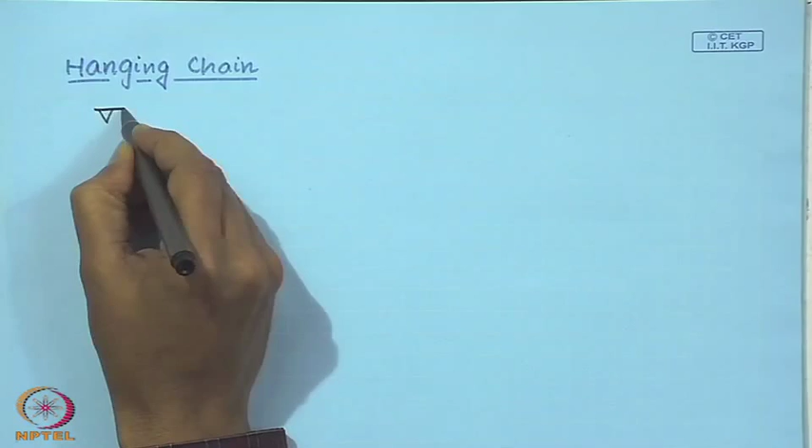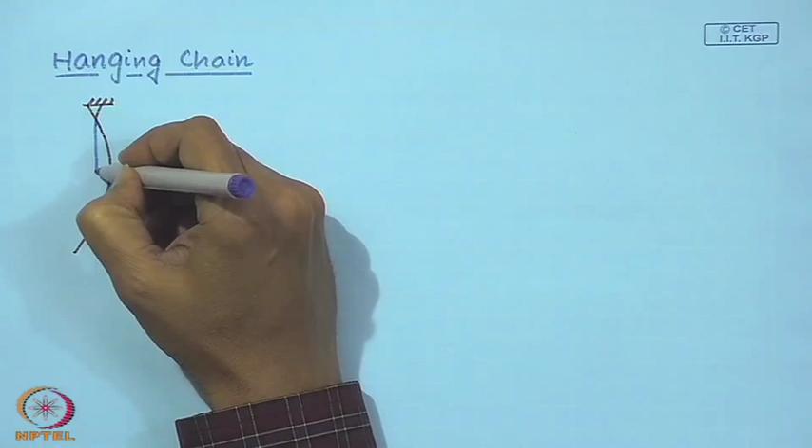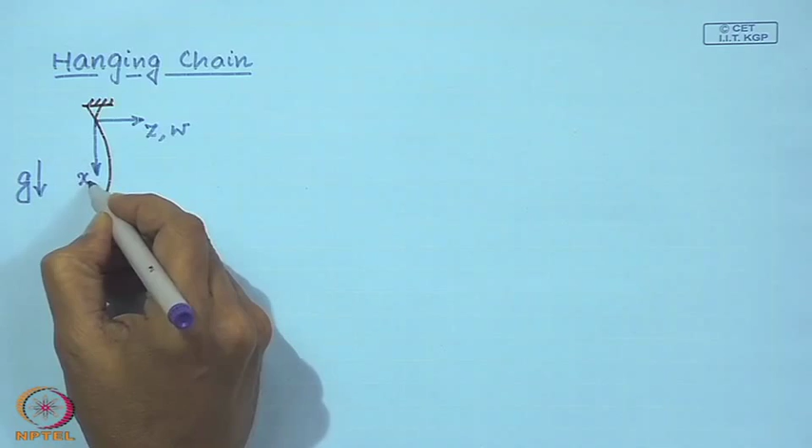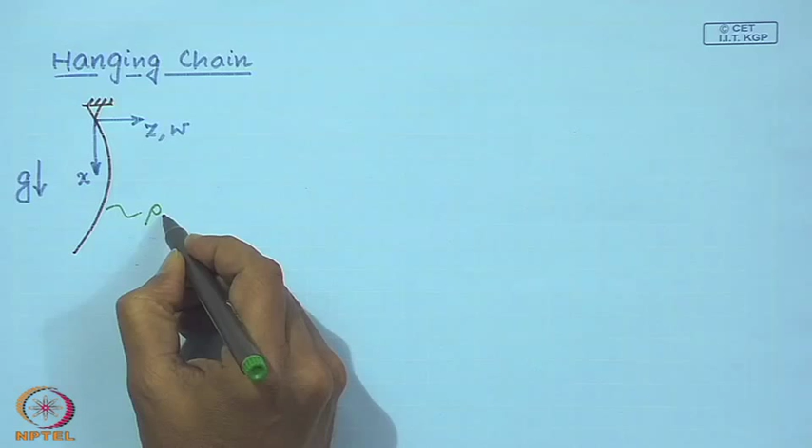Let us consider this chain hanging in a uniform gravitational field. We assume that this chain is made of a material of density rho, has a constant area of cross section A,

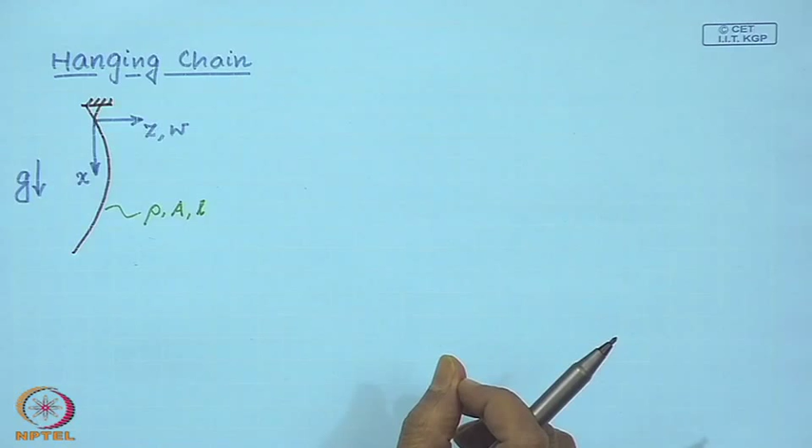and has a length L. Now, this is an inextensible chain. Though it does not resemble a string in that sense, which is a one dimensional elastic continuum, this is inextensible. Yet, as we will see very soon, the equation of motion, at least up to the linear order,

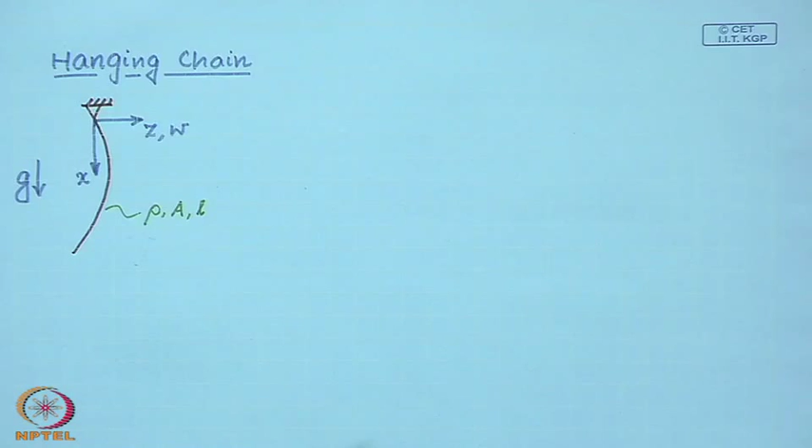is similar to that of a string. So we are going to write down the energy expressions, starting with the kinetic energy. At any location x, our field variable is w(x,t).

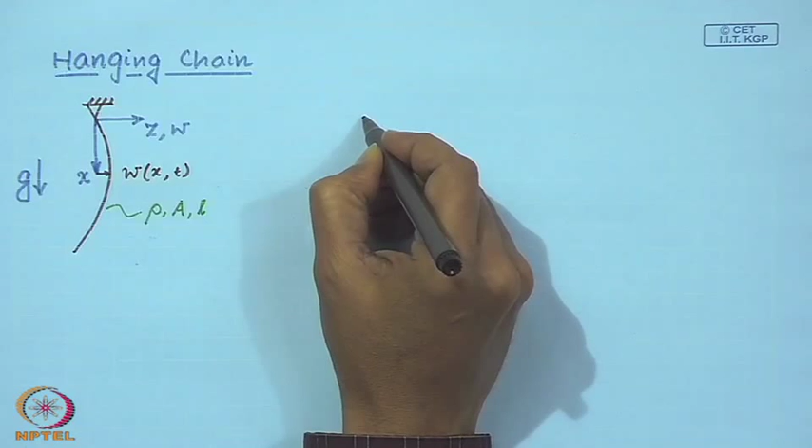So the kinetic energy of an infinitesimal element can be written as half rho A dx, which is the mass of the infinitesimal element, times velocity squared. If I integrate this over the length of the string, then what I have is the kinetic energy.

Now the potential energy of this chain. Why does this chain restore back to its vertical position? It is because as it deflects or is disturbed, the potential energy of the chain changes - it increases. To calculate that, let us look at a small element of this chain.

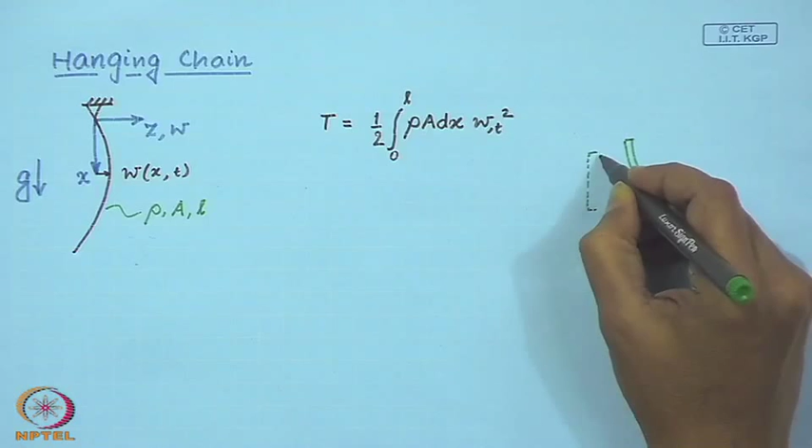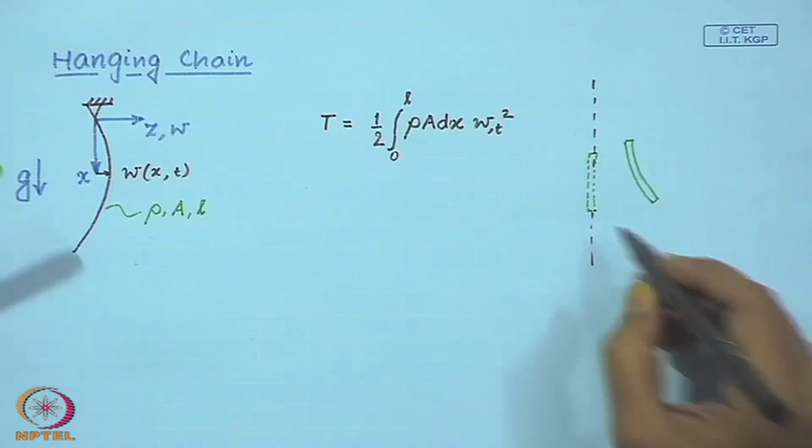This is the undeformed configuration of the chain, and this is the deflected configuration. This infinitesimal element had a length dx.

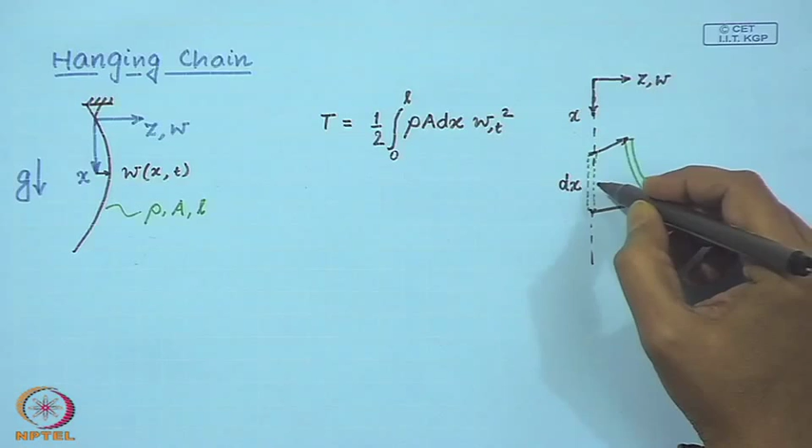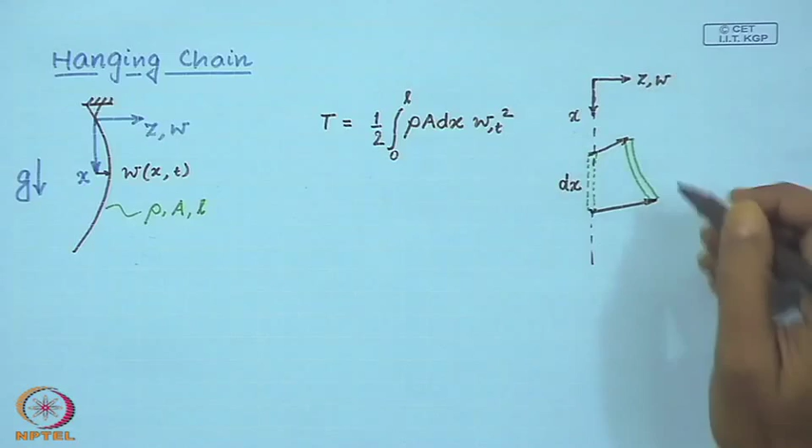Since this chain is inextensible as we have assumed, the length of this infinitesimal element in the undeflected or equilibrium configuration is the same as in the deflected configuration. So this is also dx, but now this is deflected.

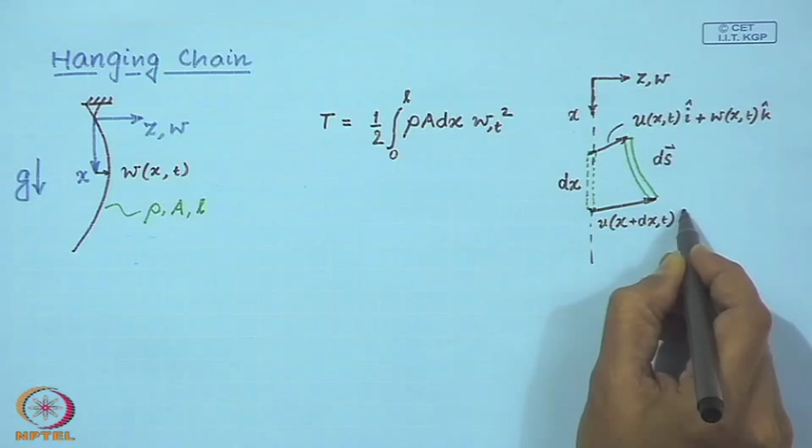So I will represent it as a vector whose magnitude is dx, and I will represent these vectors this way, and this vector at x plus dx is given by this vector.

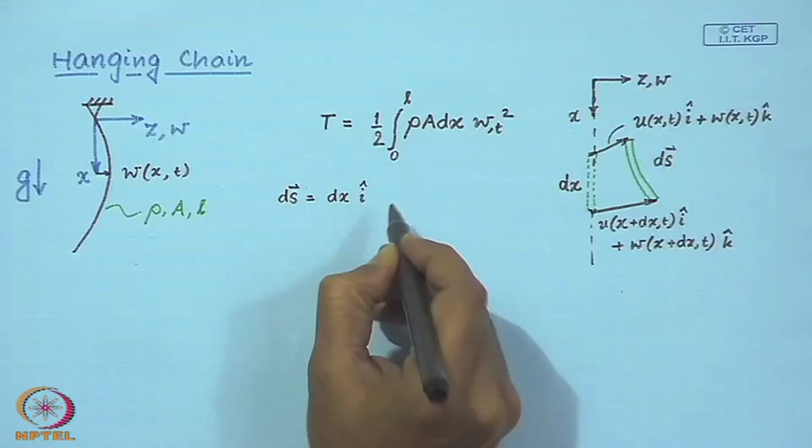So if you write out this vector equation, we can represent this ds vector in terms of the deflection of the chain.

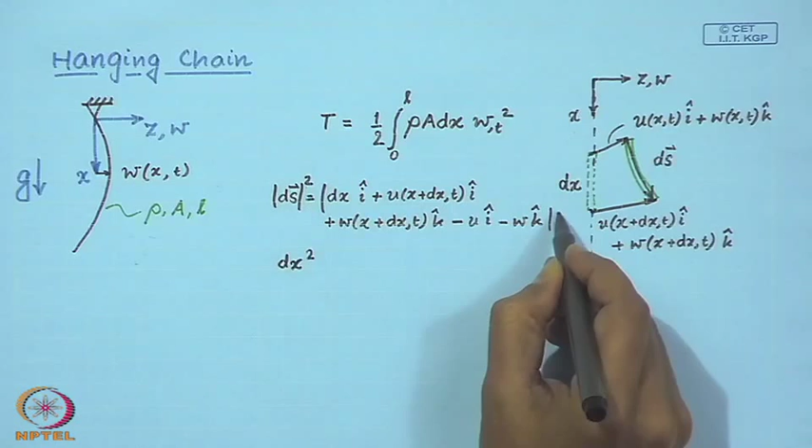Now if you take the magnitude of the vectors on both sides, then as I mentioned, the magnitude of this is still dx because the chain is inextensible. So what I will do is take the magnitude squared, let us say, and if you simplify the right hand side,

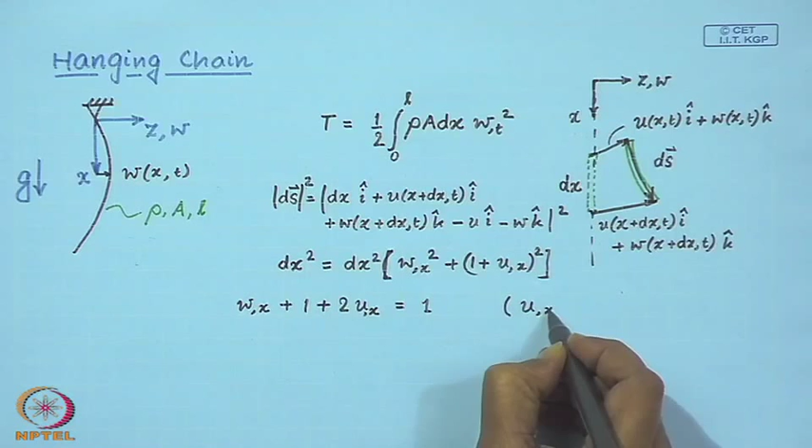we have this expression from which we can write... now here I have made this approximation. In this step, while coming from this step to this step, I have assumed that del u / del x is much smaller than 1, so in this expansion I have dropped the term (del u / del x) squared.

This implies... so I have represented the axial deflection or axial motion of the chain. Now this is very different from that in strings - in strings we had neglected the axial motion, but in a hanging chain we must consider this axial motion, because that is the reason why the potential energy of the chain changes as the chain deflects from its equilibrium position.

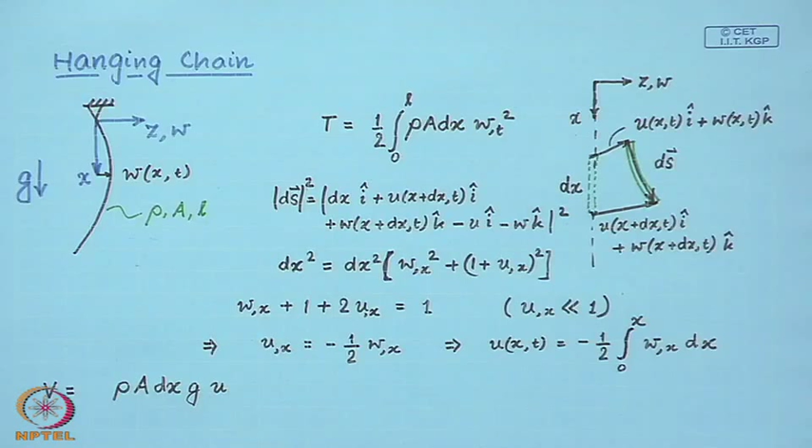So that would be the potential energy, and if you integrate over the length of the chain, that gives the net potential energy, assuming that the potential energy is zero in its equilibrium configuration.

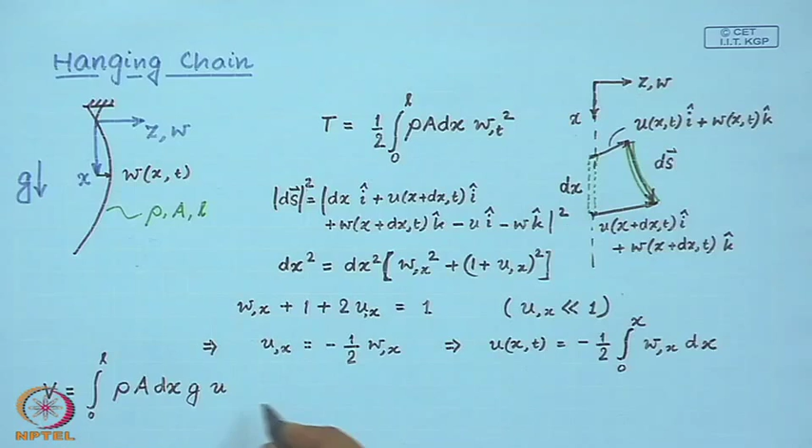Now what I can do is integrate this expression by parts. I can write this taking u as the first function and rho A g as the second function,

so the first function times the integral of the second function, minus the integral of the derivative of the first function times the integral of the second function.

Now this simplifies - this boundary term can be written as u evaluated at L, so that would mean this integral with x replaced by L.

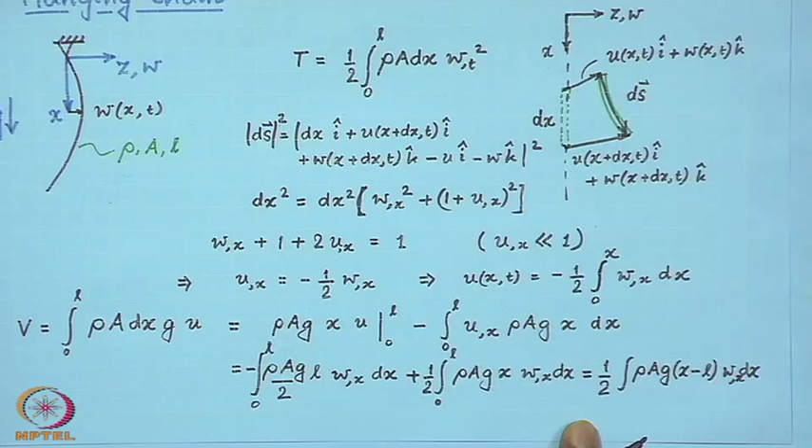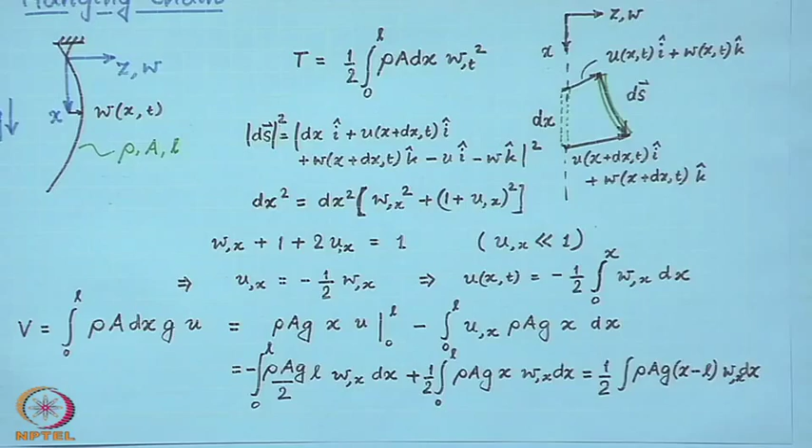So we have the kinetic and the potential energy expressions of the chain. Let me write them again.

So if you look at these expressions, this kinetic energy expression resembles the kinetic energy of a normal elastic string, and this potential energy expression also resembles that of a string, except for this term.

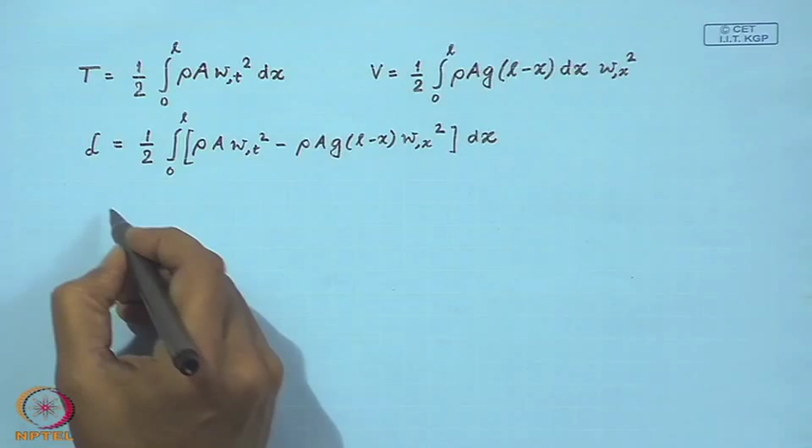may be expressed like this, and from Hamilton's principle, which says the variation of the action is 0, we can write...

Now here, once again, as we had done before, we will integrate by parts this term with respect to time and this term with respect to space, to obtain...

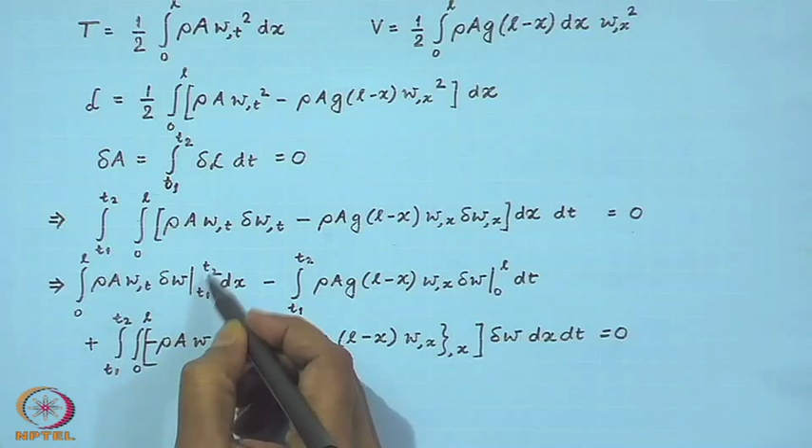So this is what we obtained finally. Now, as we had stated before, since we know the configuration of the chain at the time instants t1 and t2, there cannot be any variation of the configuration.

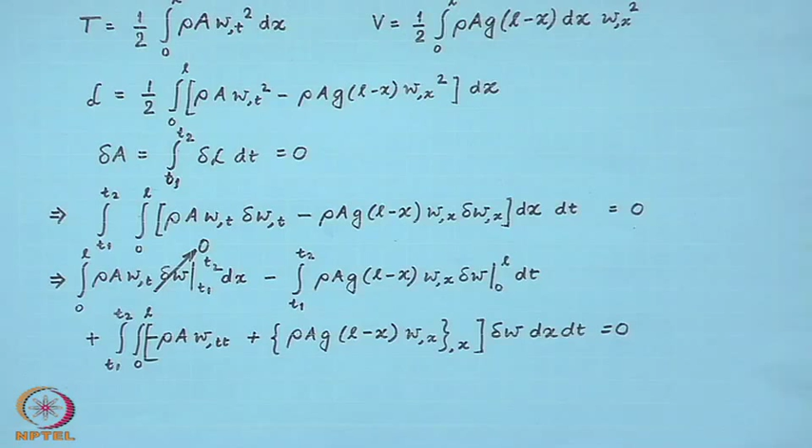So at both times t1 and t2, this variation must vanish. Now here is a term which is evaluated only at the boundaries, and here it is evaluated over the full domain, integrated from 0 to L. Now, I can always hold the boundary variation fixed and change the inner portion arbitrarily, so therefore, if this sum has to vanish, they must vanish separately.

So for arbitrary variation, if this integral has to vanish, then we can write this must be 0, which is our equation of motion of the hanging chain.

Now, these boundary terms must also vanish, so this will give us the boundary conditions. So let us have a look at the boundary conditions.

Now, at x equal to 0, at this boundary, either this must be equal to 0, or, now in our case, if you consider that the chain is fixed at the top end, then this is the boundary condition.

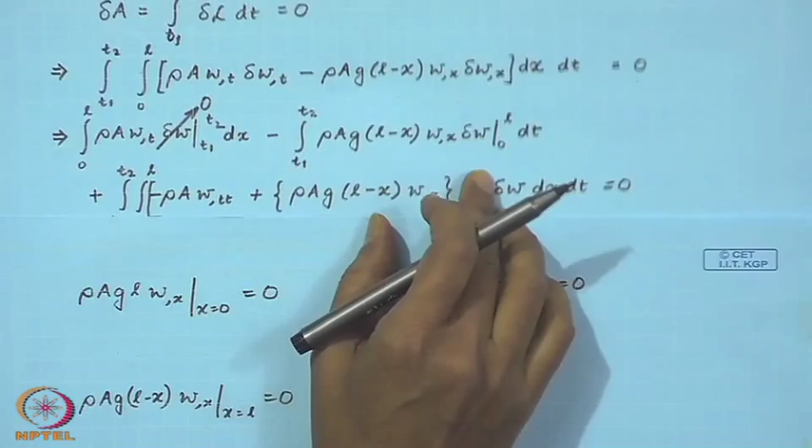So here, as you can see, at x equal to L, this term vanishes. Now, this, remember, was the tension in the string, and tension at the free end of a hanging chain is definitely 0.

So if you consider this, there is a product. Here, in this case of a chain with a free end, this vanishes.

Now, in order to have 0 contribution from the boundary at x equal to L, you must have this variation to be finite, because this part of the boundary term is 0 at x equal to L.

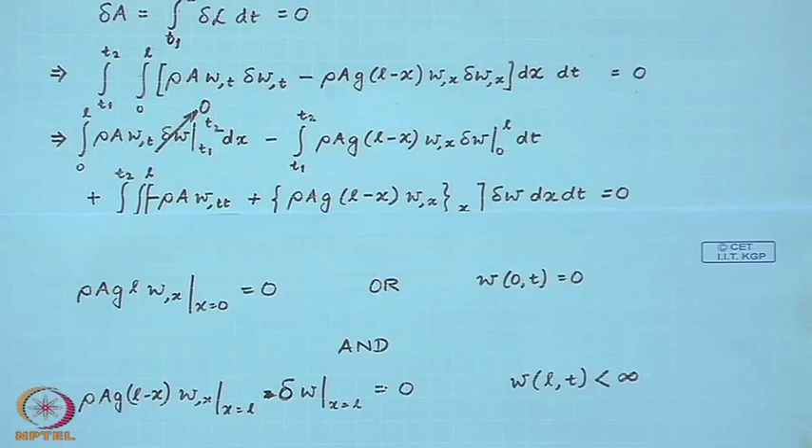So therefore we usually say that the deflection of the string, of the chain, at the free end must be finite, and the implications of this boundary condition will be seen when we discuss the solution procedure for the string, the hanging chain.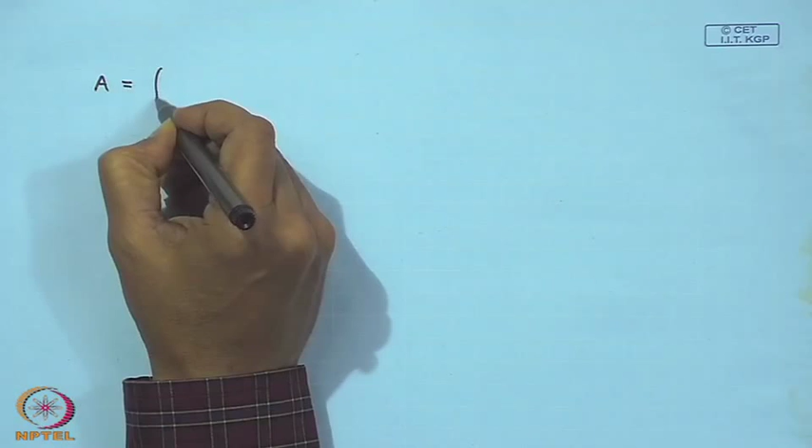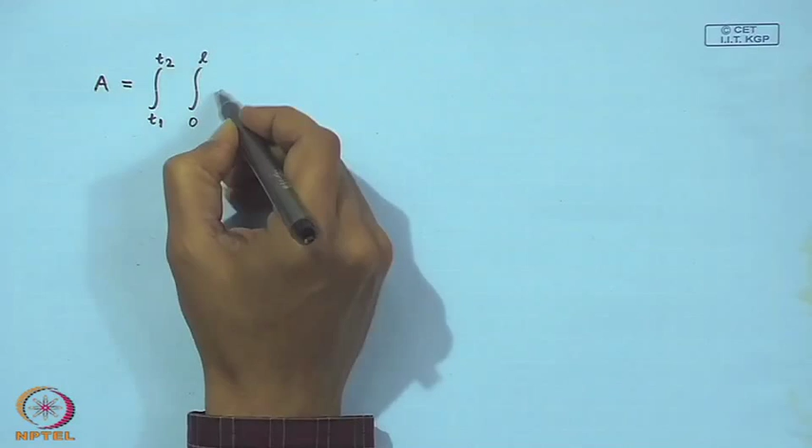Next, we are going to slightly generalize the procedure. So we have been looking at action integrals in which the Lagrangian is a function of the velocity, the slope. It may also be a function of the field variable w itself, and it may be a function of time.

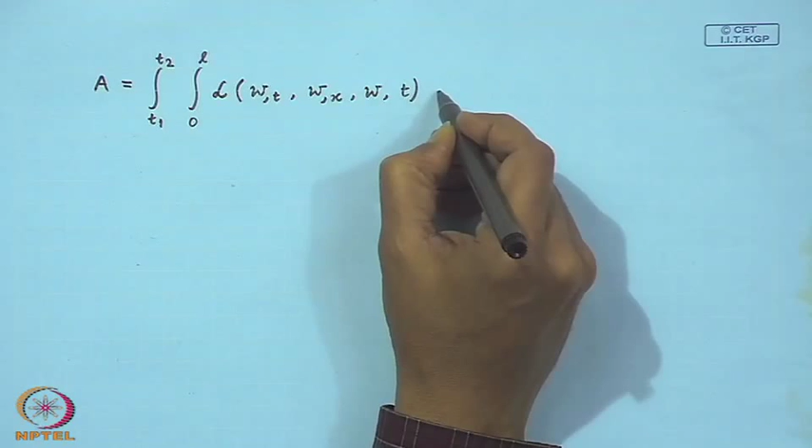So let us slightly generalize what we have been doing for a Lagrangian which has this form, which is a function of the velocity, the spatial derivative of the field variable itself, and maybe time.

So if we say that the variation is 0, that would imply... so delta L may be written as...

in this form. Now I will integrate by parts the first two terms in the integrand, the first term with respect to time and the second term with respect to space, and of course this must be 0.

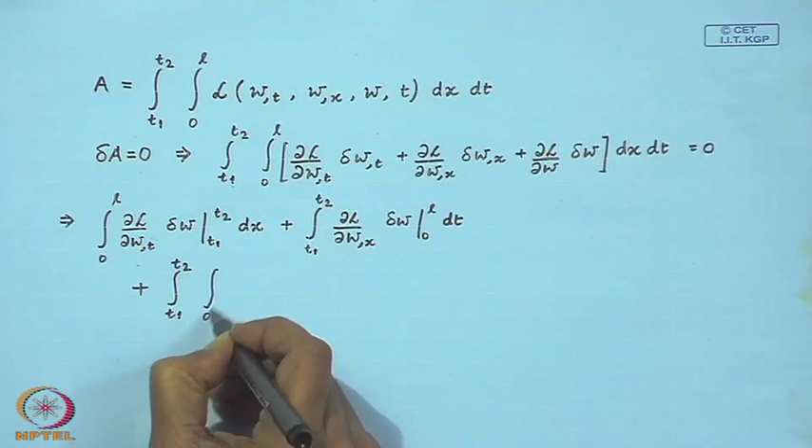So that implies, here we have minus the derivative with respect to time, minus derivative with respect to x, and delta W comes out common, and that must be 0.

Now, as you know, at these two time instants, I definitely know the configuration of the system, which means I completely know my field variable, so there cannot be any variation of the field variable at these two time instants.

So if the rest of the terms must vanish for arbitrary variation delta W, you see this term which is evaluated at the boundaries, and this is dependent on the total domain. Now I can fix the variation at the boundary and change the variation over the domain, so these two terms must independently vanish for this sum to vanish.

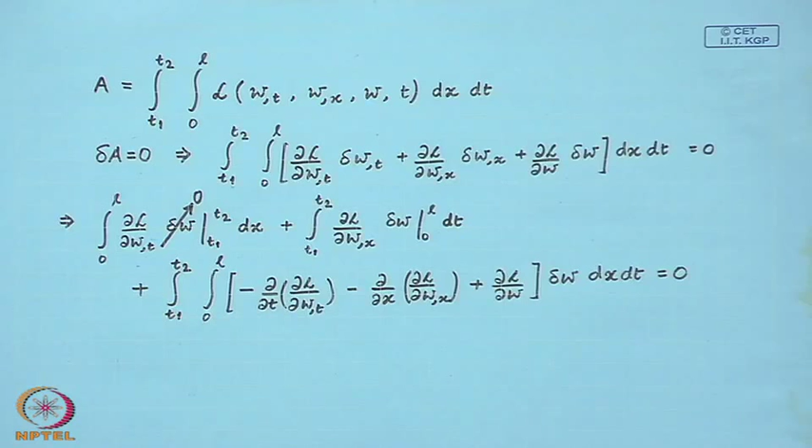So for arbitrary variation, if this integral is to vanish, then it must be true... and this is our equation of motion.

And what we have from this term, we have the boundary conditions. So the boundary conditions, the possible boundary conditions, could be...

So, del L del W,x at x equal to 0 is 0, or W itself at 0 must be 0, and del L del W,x at x equal to L must be 0, or W at L must vanish. So these are the possible boundary conditions for the problem.

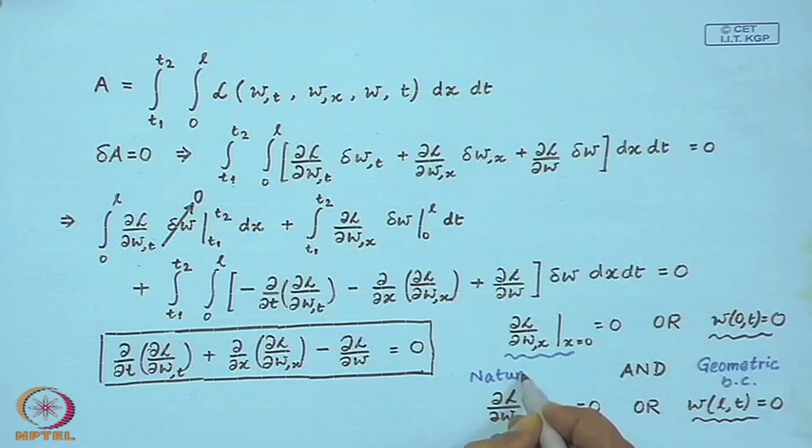Now it so happens that boundary conditions of this type are the geometric boundary conditions, while these boundary conditions are the natural boundary conditions of the problem.

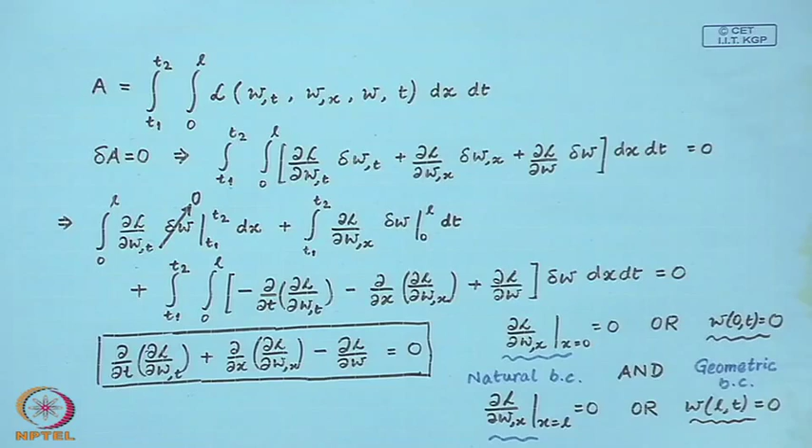So let us look at some applications of this generalized formulation for vibration of bars. So we consider first axial vibrations of a bar.

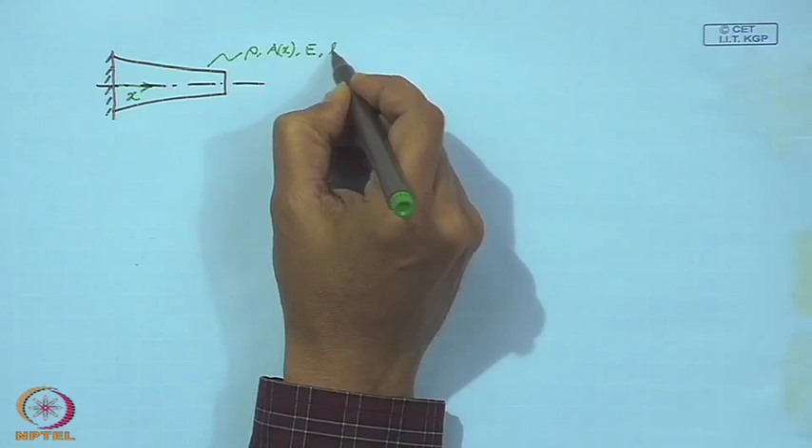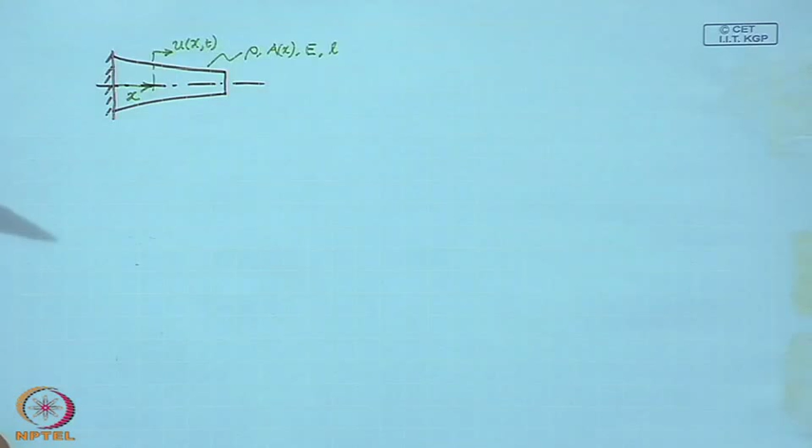So, the field variable is u(x,t). So, first we write down the kinetic energy.

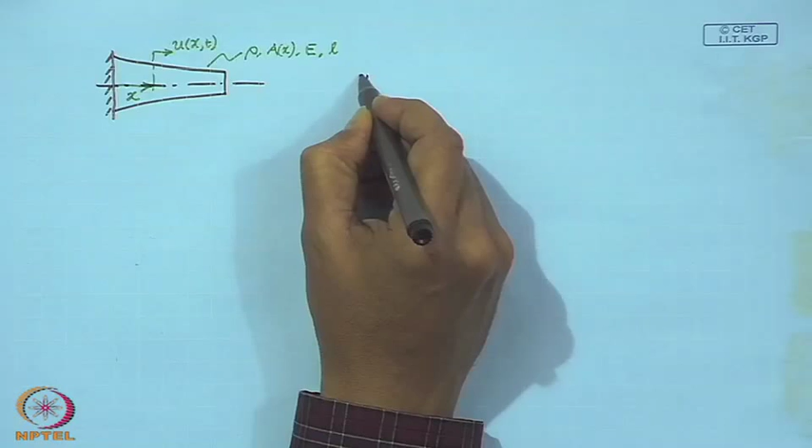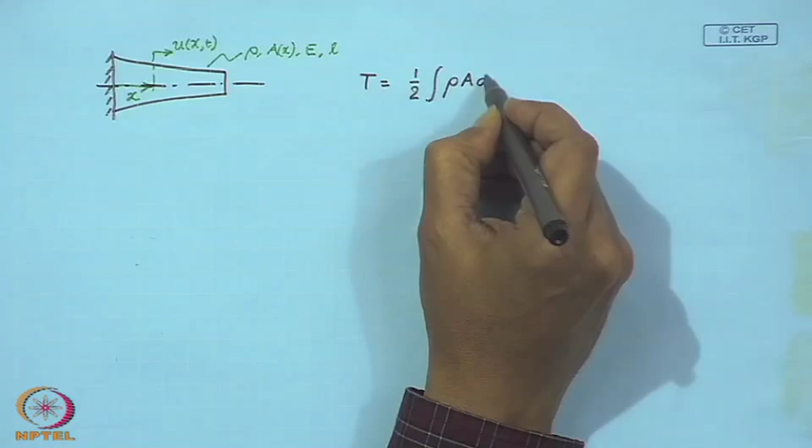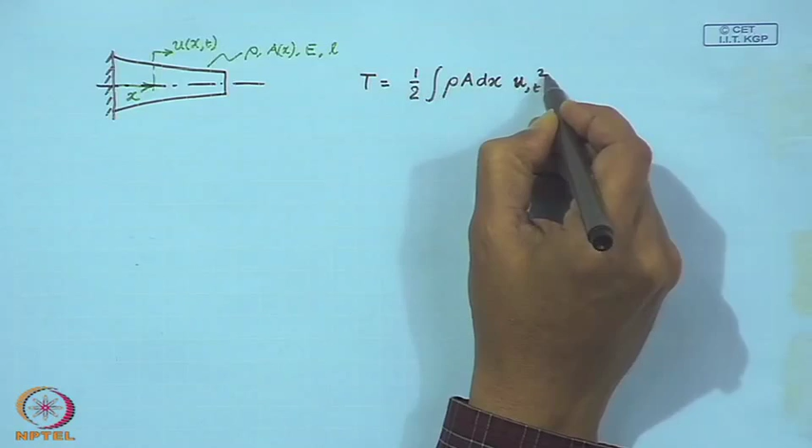So, if rho is the density, A is the cross section, then this is the mass of an infinitesimal element into the velocity square, and this integrated over 0 to L will give you the kinetic energy of the bar.

Now, the potential energy of the bar may be written from elasticity theory as half times the stress times the strain, and this is per unit volume. So, I must integrate this over the volume. So, if A is the area of cross section, A dx is this little volume element, and this integrated from 0 to L will give us the total potential energy of the bar.

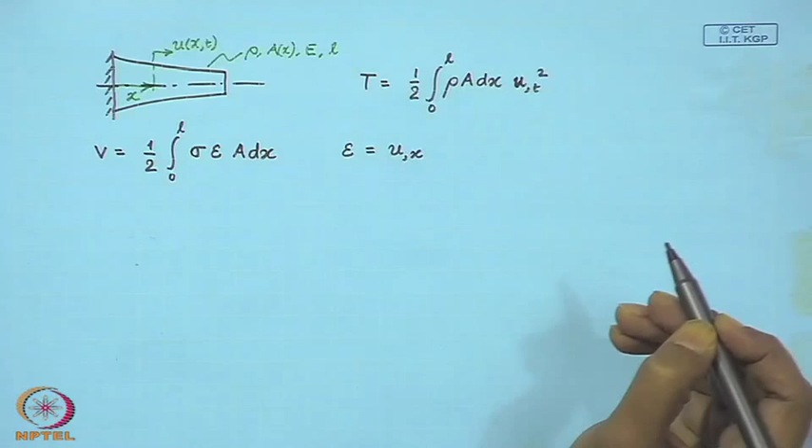Now, strain, as we have derived before, is del u del x, and sigma is... Therefore, this is the expression of the potential energy of the bar.

Now, what we have been describing as the Lagrangian, or what is more appropriately called the Lagrangian density, is given by...

Now, as derived, the equation of motion will be obtained from this equation.

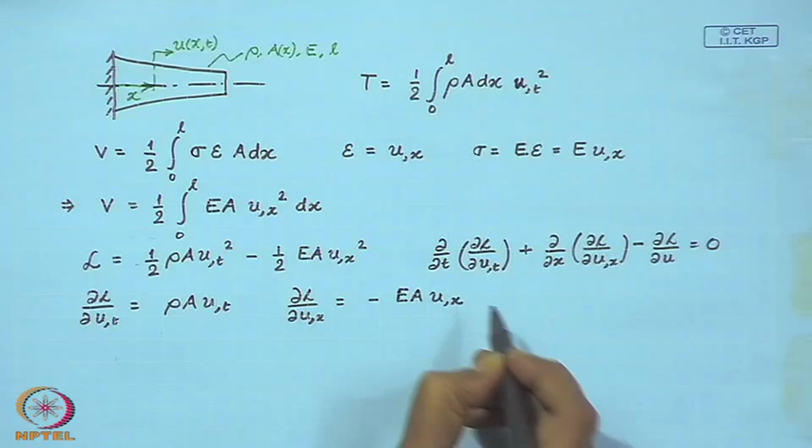Now, as you can see, there is no explicit dependence of this Lagrangian density on u. So, this term here is 0. So, what we have is only these two terms. So, del L del u,t is... and del L del u,x is...

So, therefore, the equation of motion is obtained in this form, which we have derived before as well. And the boundary conditions are obtained, the possible boundary conditions would be...

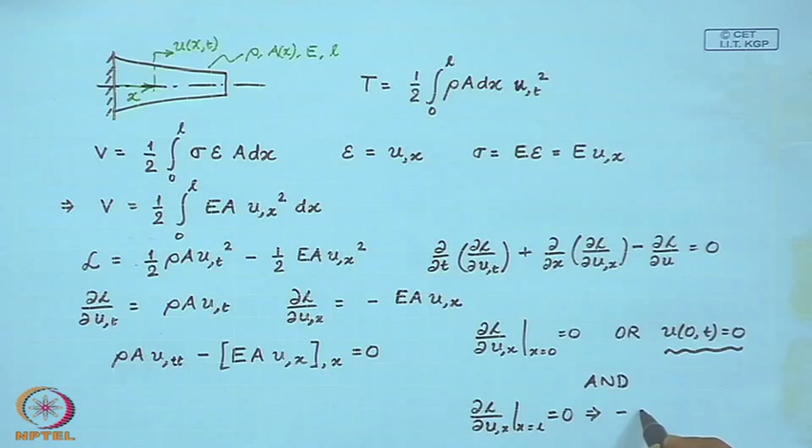In this case, of course, the boundary is fixed at x equal to 0. So, this is our boundary condition at x equal to 0, and at x equal to L, this is the boundary condition at x equal to L.

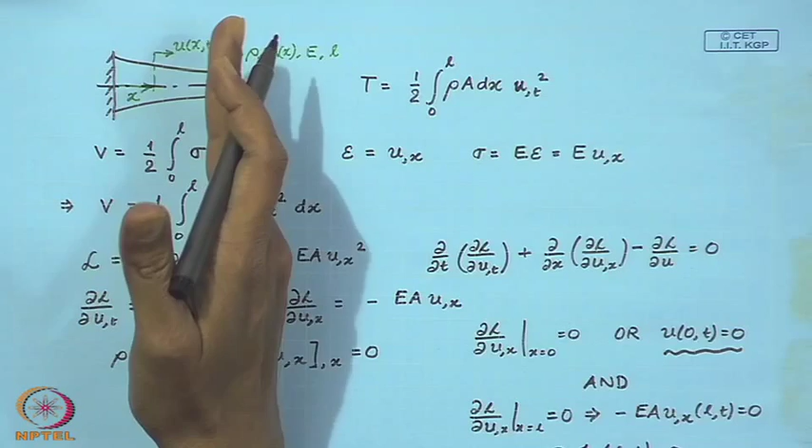There is another possibility which does not apply here. So, if the bar is fixed at the other end as well, then we have this boundary condition, but that does not apply here. So, in our case, for this fixed-free bar, these are the boundary conditions of the problem.

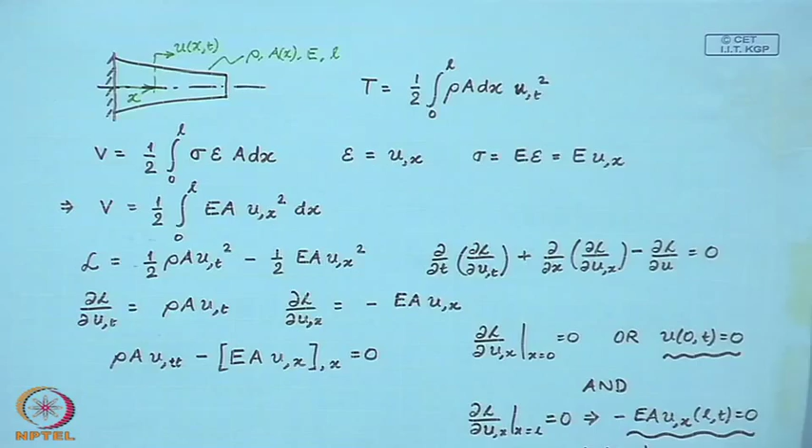Now, let us discuss this for torsional vibration of a circular bar as well.

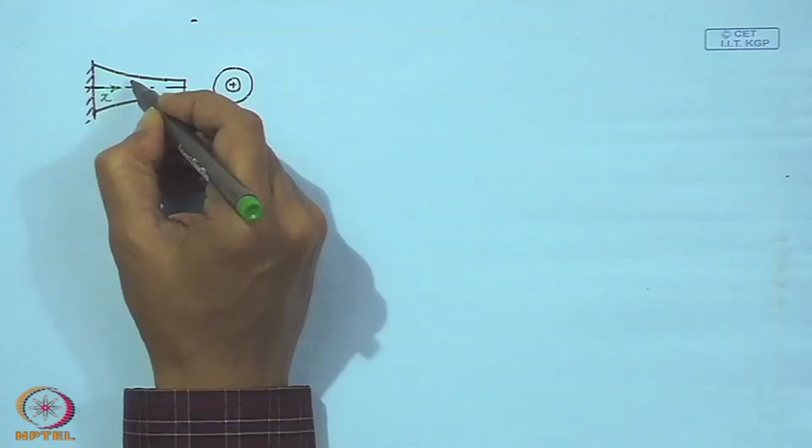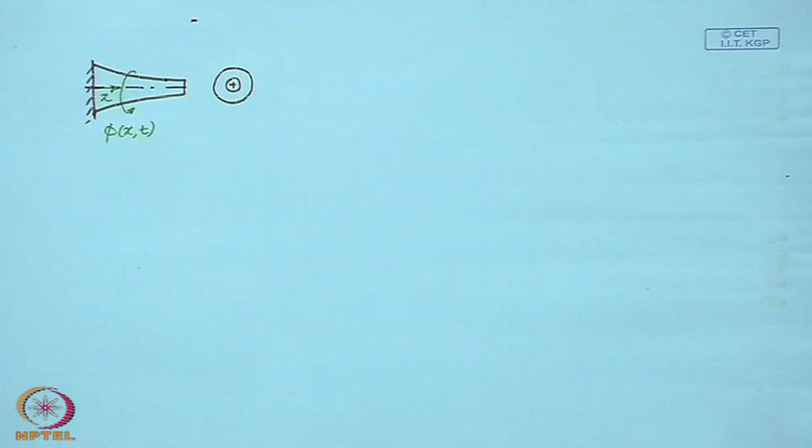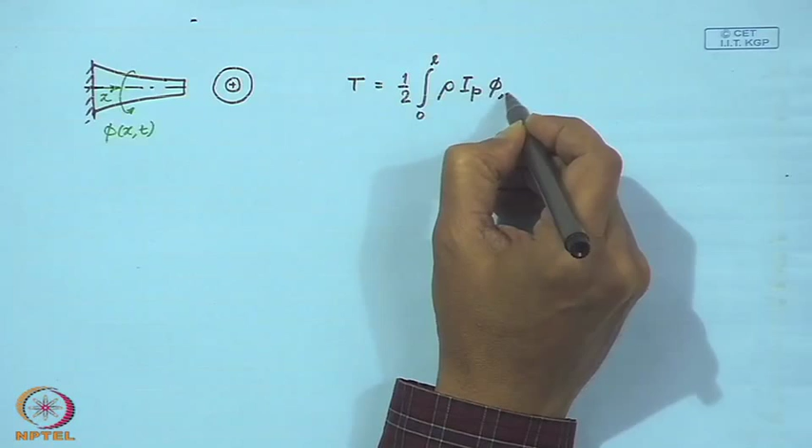So, if phi is the field variable, then I can write the kinetic energy in this form.

Now, to write the potential energy of this bar, again from theory of elasticity, now as we know that the shear stress is varying over the cross section, I must first integrate over the cross section and then finally over the length. So, this is energy per unit volume, and that I integrate over the total volume to obtain the total potential energy.

And we know that the shear strain is given by r times del phi del x, and shear stress is G times the shear strain. So, if you substitute these two expressions in here...

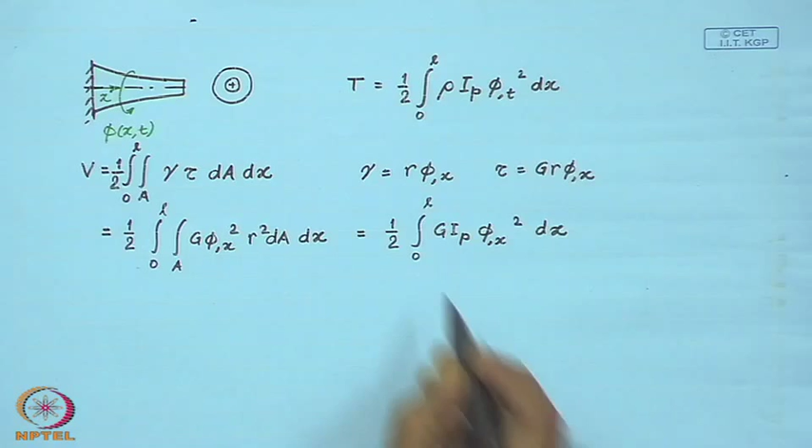This will simplify to G times Ip. So, this of course comes with a square. So, that is the potential energy expression for this bar.

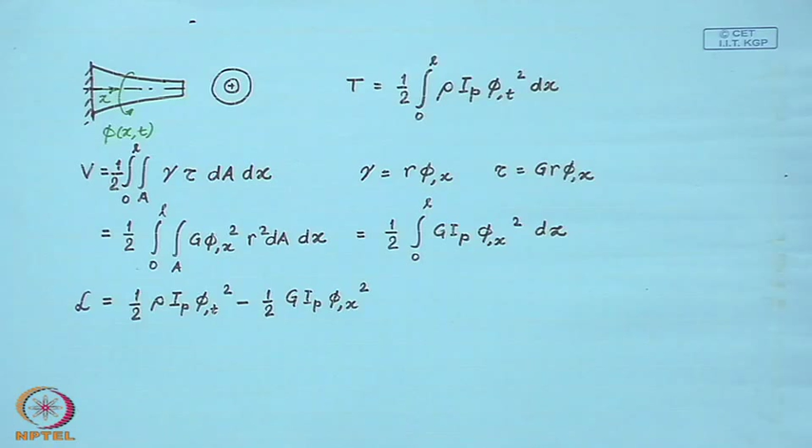So, our Lagrangian density is given by this expression. Now, once again we apply our equation of motion, which reads...

Once again we find that this Lagrangian density is independent of phi. So, this term, the third term, is 0. So, once I have evaluated these terms, I can now write down the equation of motion.

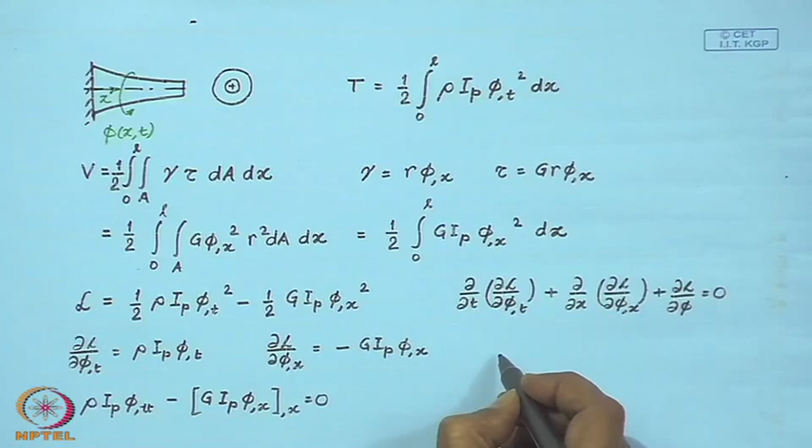In this form, and the boundary conditions are obtained as: at x equal to 0, since this bar is fixed to the wall, there is no twist in the bar, and at x equal to L, this is a free end, so phi is not fixed.

So, this term must be 0, which implies... so these are our boundary conditions for the problem. This is a geometric boundary condition, and this is a natural boundary condition.

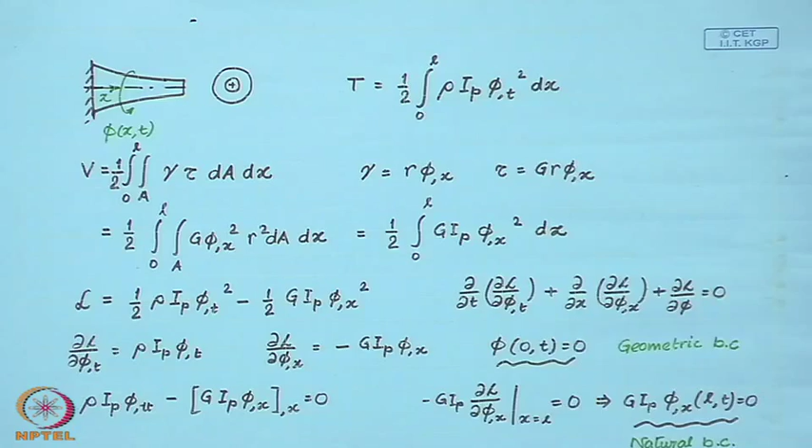So, what we have looked at in this lecture: we started with the dynamics of a hanging chain, derived the equation of motion and the boundary conditions. Then we generalized the variational approach to finding the equation of motion and boundary conditions, derived a general form, and applied it to two examples. We will carry this forward and see applications in other examples in subsequent lectures. That is the end of this lecture.